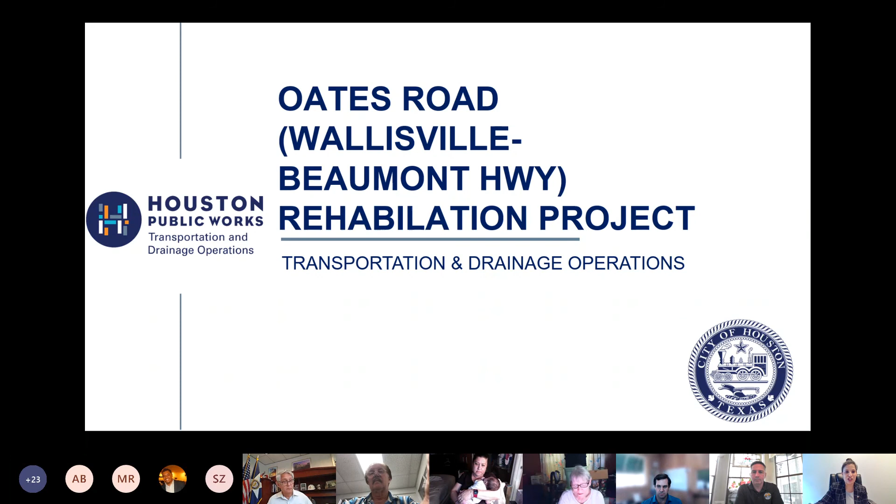So our project details for Oates Road: our limits, as the council member stated, are Wallisville to Beaumont Highway. Our anticipated start date is winter 2021, when we will begin construction. The length of our projects here at the Houston Public Works Department are measured in lane miles, so per lane, per mile.

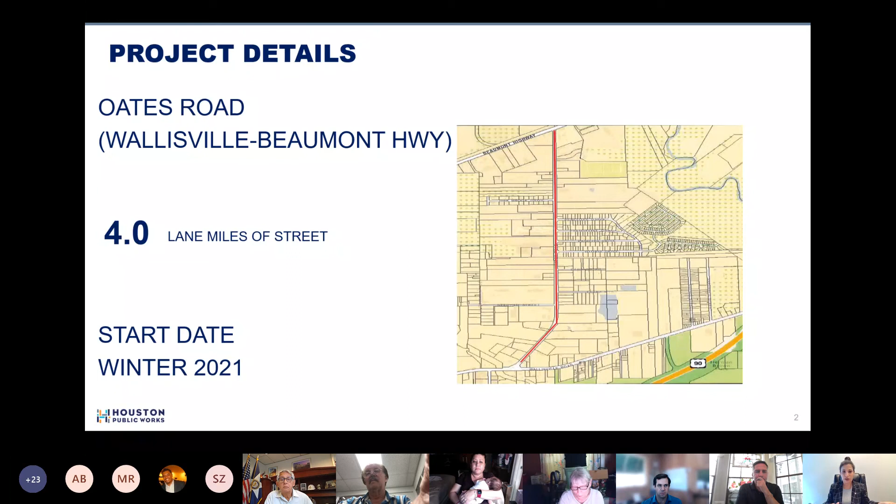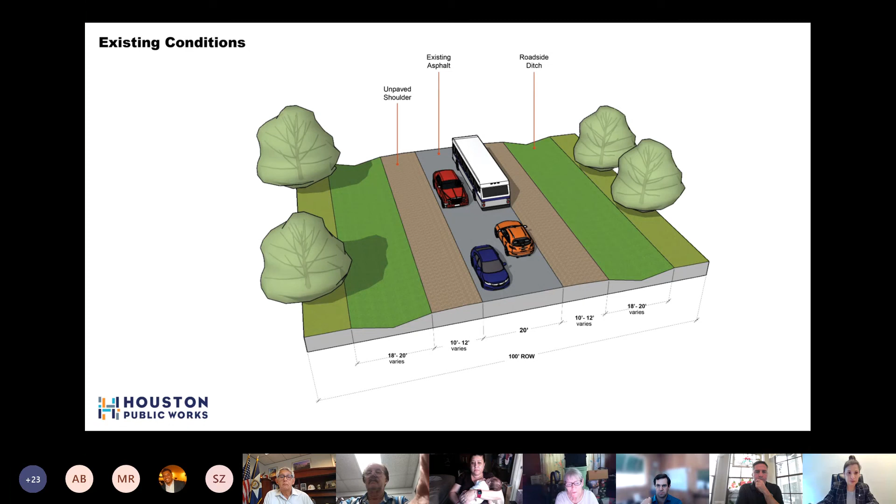The Street Rehabilitation Initiative was created to focus on extending the life of our existing infrastructure, by rehabilitating our street surfaces, fixing the curbs, and bringing areas of need up to accessibility standards.

The goal is to provide the community with a noticeable improvement and to maximize our assets. So we will be conducting base repairs, paved shoulders, and a mill and overlay for the construction.

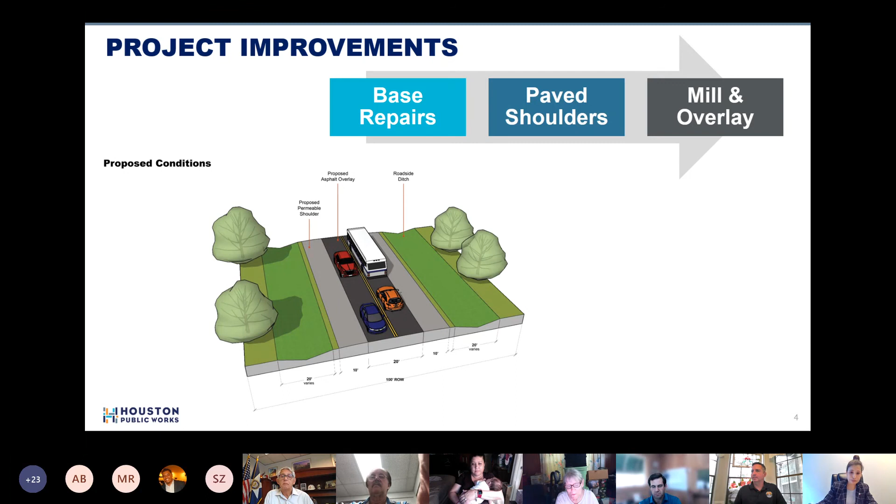Once all the necessary base repairs have been made, the contractor will then lay the new asphalt on the roadway within the project limits described in the previous slides.

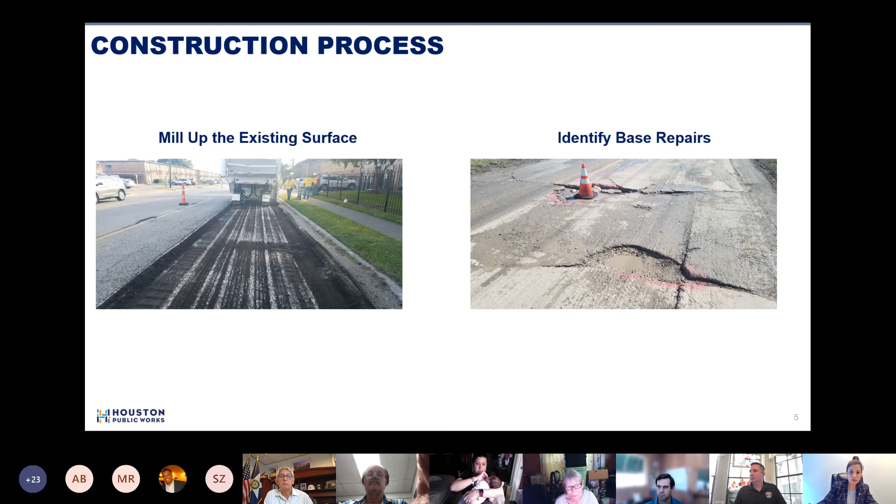In the past, Oates Road has received numerous maintenance repairs, which means we've restored small areas to safe use, but we recognize that these pothole repairs and skin patches have a very short lifespan.

That's why we are conducting the rehabilitation project. The goal is to improve the pavement condition and driver experience. In some cases, the new asphalt area will last 5 to 8 years, and in some cases 10 to 15.

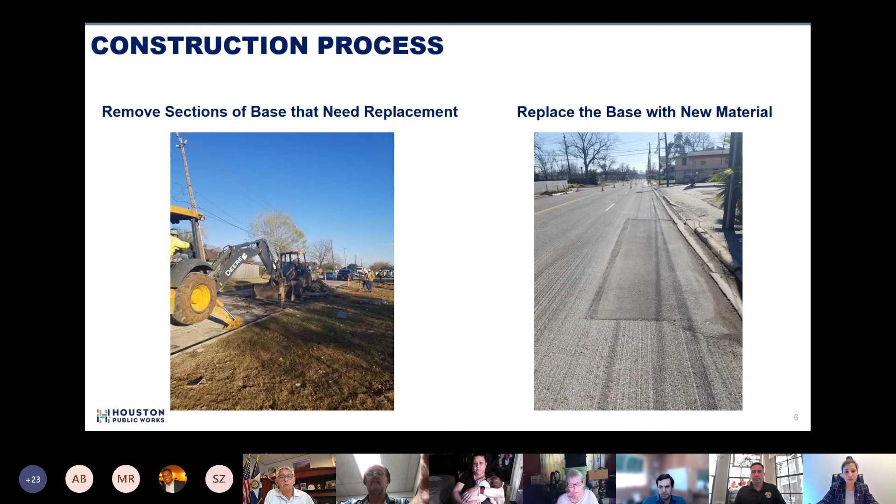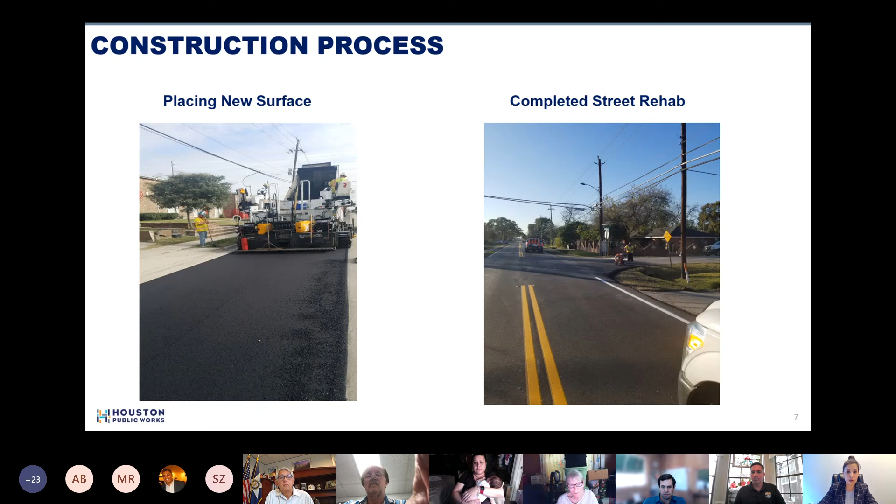We will not be touching the actual feet of the right-of-way. We will be paving the shoulders again, and we will not be touching the roadside ditch.

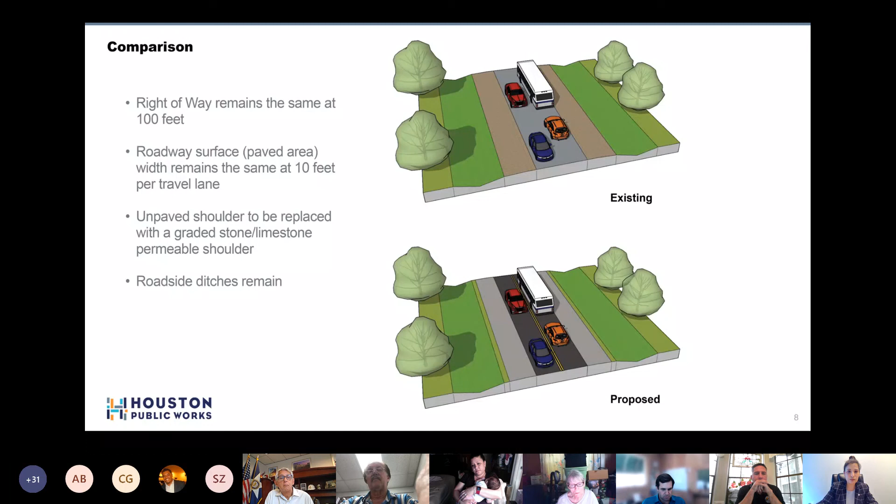During our construction, safety is our number one priority, and we want to be sure the community is aware of the heavy machinery, the trucks, and the signage, so that everyone stays safe during this process.

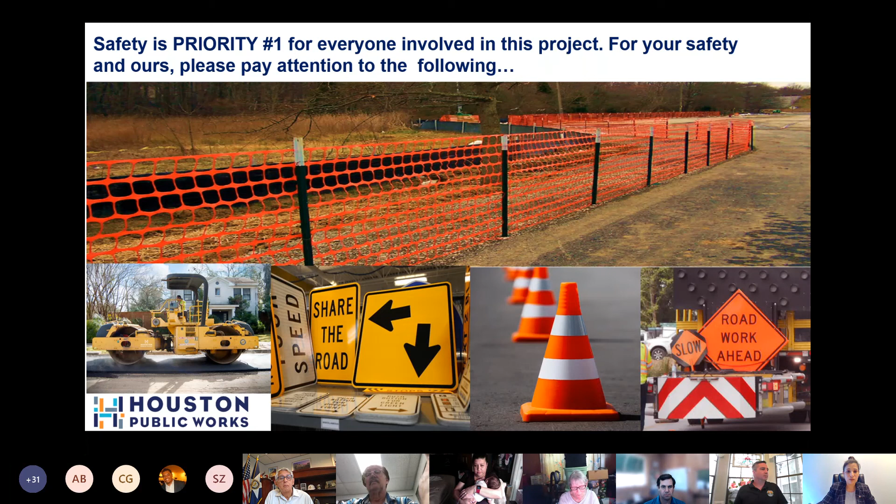Our contractor is required to distribute door hangers, and in some cases, actual letters.

On those door hangers and letters, citizens will find pertinent information related to the project, so we ask that everyone hang on to that information throughout the construction process.

As we begin the construction phase and wrap things up, we want to make sure we're addressing any concerns and answering any questions related to the construction.

We will be posting a copy of the presentation and the link to the recording at our engagehouston.org webpage, and for any questions, you can always call 311 or email 311.

At this time, I'm going to introduce Donald with our consulting firm to discuss the design concept report in more detail.

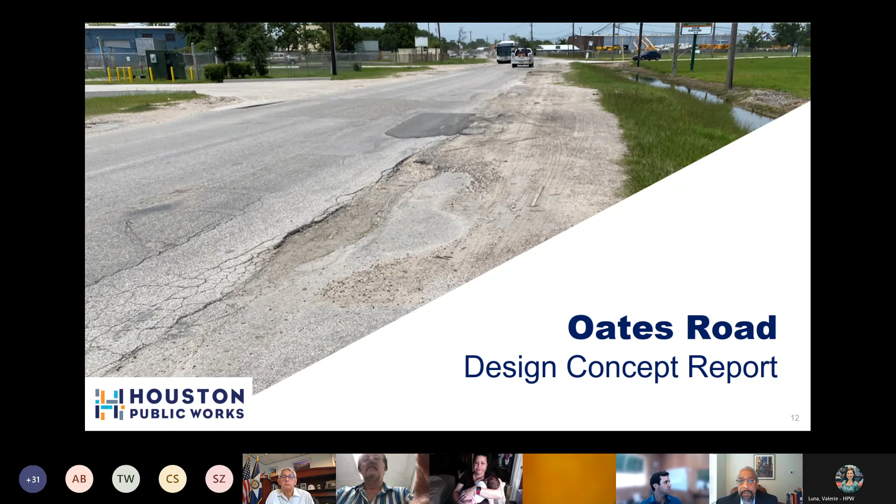The purpose of the DCR, the Design Concept Report, is to identify long-term needs, and we will be developing solutions to address those needs or deficiencies.

Long-term improvements we'll be evaluating include total roadway reconstruction, that's concrete pavement. Paved shoulders will depend on which cross section we go with.

If we decide that curb and gutter is the best approach, then we would not have paved shoulders. But if we are reconstructing the roadway, depending on the cross section, paved shoulders could come into play.

We would also be looking at any capacity improvements that are needed. Drainage and flooding improvements will be addressed, identified, and included as part of the project. We're currently looking at the need for sidewalks and bike lanes for connectivity to the city's overall bike plan. Certainly we'll be looking at safety enhancements, knowing that there are a lot of large trucks out there. Maybe we would be looking at a two-way left turn lane to improve access management and also safety.

And again, we would be looking at intersection improvements, mainly at the intersections on the two ends of the roadway, that's Beaumont Highway and Wallisville Road. And as part of an overall reconstruction, we would be looking to upgrade the signing and pavement markings for the roadway.

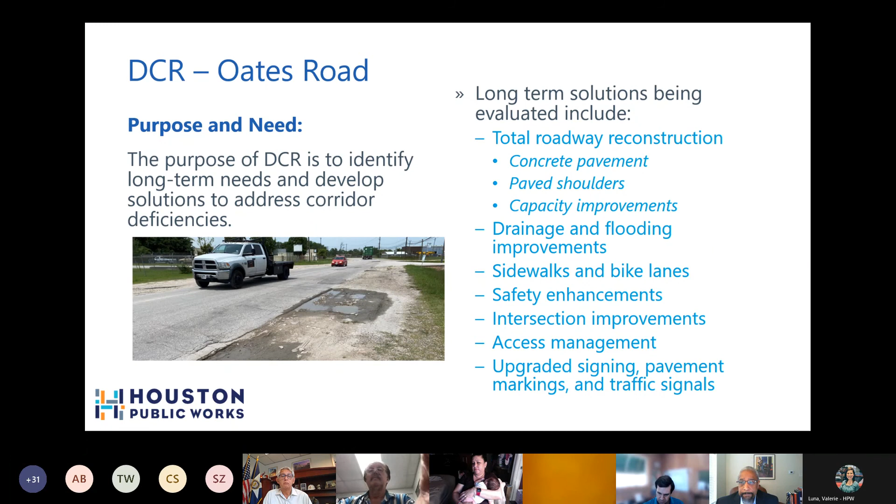Next slide, please. This chart outlines the project development process, the steps that will be taken as part of the DCR. The planning part of this project is the design concept report. Then we would follow into design, that's the plan, specifications, and estimate, the actual development of the construction drawings. Then the project would eventually go into construction. Once construction is finished, there's always ongoing maintenance and operation activities by the city to keep the roadway up to desirable standards.

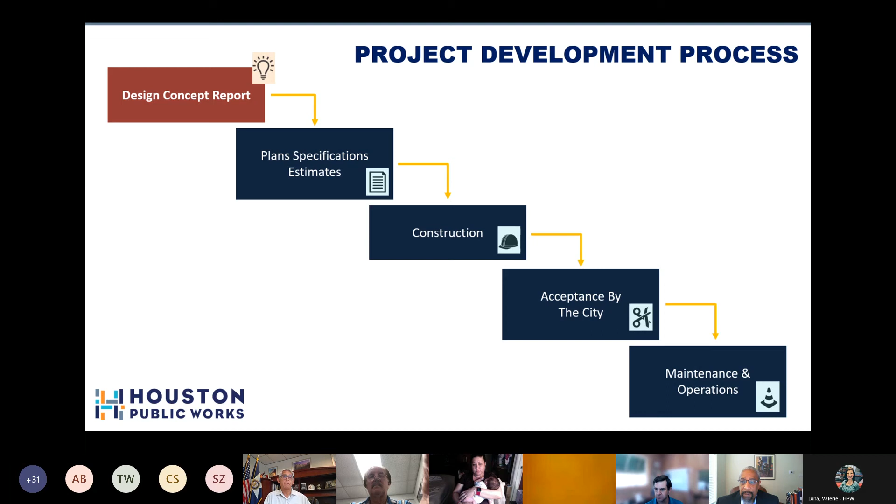Next slide, please. We'd like to give you an overview of the DCR schedule. This graphic is our schedule for completing the DCR. This is a three-stage process. Stage one is evaluating existing conditions and identifying the needs. We have completed stage one, and we're starting stage two. As part of stage two, it will consist of evaluating various alternatives and improvements, and it will conclude with a recommendation of a preferred alternative to serve Oates Road for the long term.

Near the end of stage two and before starting stage three, we will host another public meeting very similar to the one we're holding today, to get your input before finalizing the preferred alternative. So today is just the kickoff of the design concept report to identify long-term needs, but we will certainly be coming back to this group to get your input before we finalize what will be considered the preferred alternative. That will occur before the end of October.

Under stage three, which is the final stage of the design concept report, we'll be defining more of the engineering details of the project. Also as part of that stage, we will be seeking funding from various sources so that the project can move into final design. Stage three completes the DCR process, and we're planning to have that completed during the first part of December.

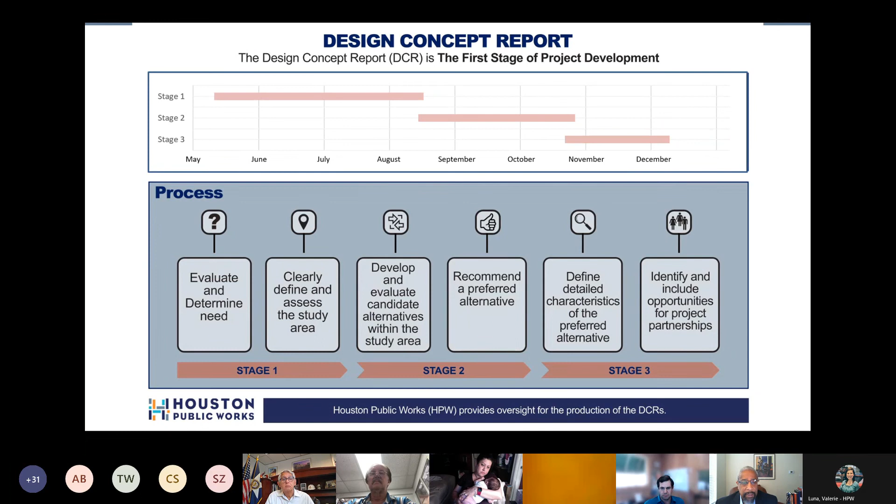Currently, there's no visible striping or pavement markings - a new project would certainly include that. Unpaved shoulders, depending on the final preferred alternative, may become paved shoulders or curb and gutter. We've identified that the existing storm sewer system has inadequate capacity at certain places. I'm sure during major rainstorms, and even typical events, you've probably seen some flooding occur on this roadway. Drainage improvements will certainly be a big part of the overall roadway reconstruction.

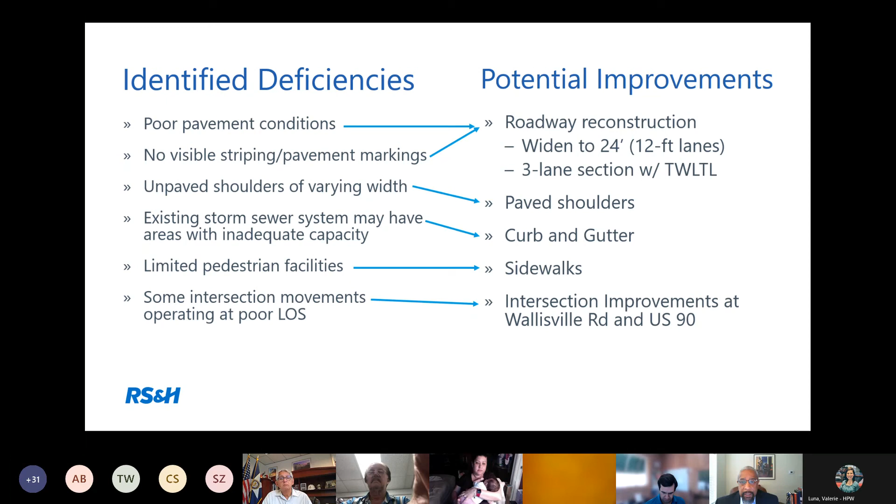So that concludes the briefing on the DCR process, and I'm sure there will be questions. We look forward to getting your input.